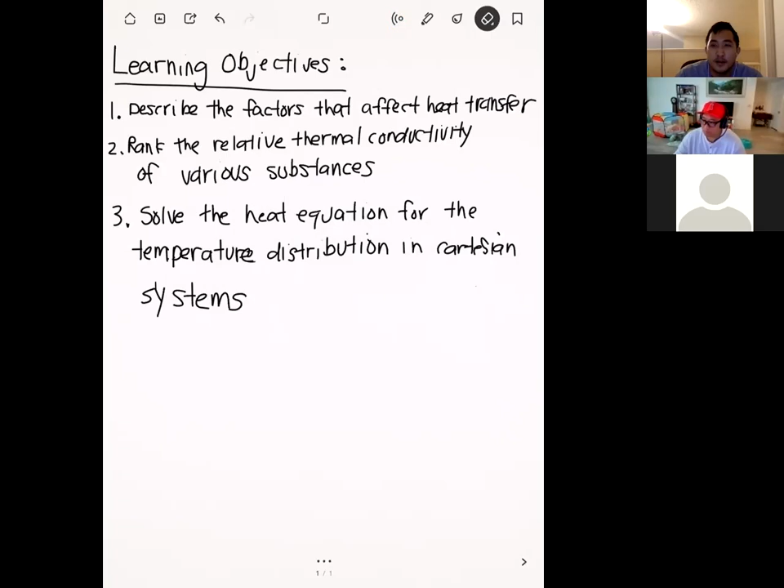So have you and your fiance started planning stuff yet? Not really. With the pandemic and everything, we haven't really started looking, but we're thinking about getting just legally married first, because we don't think we're gonna have a wedding maybe within the next 2 years even. So we're thinking just get it done at the courthouse, and we'll deal with the wedding after the pandemic. That's what a lot of my friends do.

Yeah, some of my friends have done a virtual wedding actually. They did the ceremony virtually, and they kind of just interacted with people online too. So that was kind of nice. They had already planned their wedding for end of 2020, so of course they had to cancel it. But the bride already had the dress and everything, so she wanted to wear it on the day of. So they had just a virtual ceremony on that day.

That's tough. When my wife gave birth to our daughter, I couldn't leave the hospital room for 4 days. Oh man. Not even to eat. I had cold sandwiches and salads. Oh man. So it was tough. That sounds tough. Just because no one can come visit in the hospital at all, huh? No visits. My wife had to give birth with a mask. Dang. Yeah, it was tough.

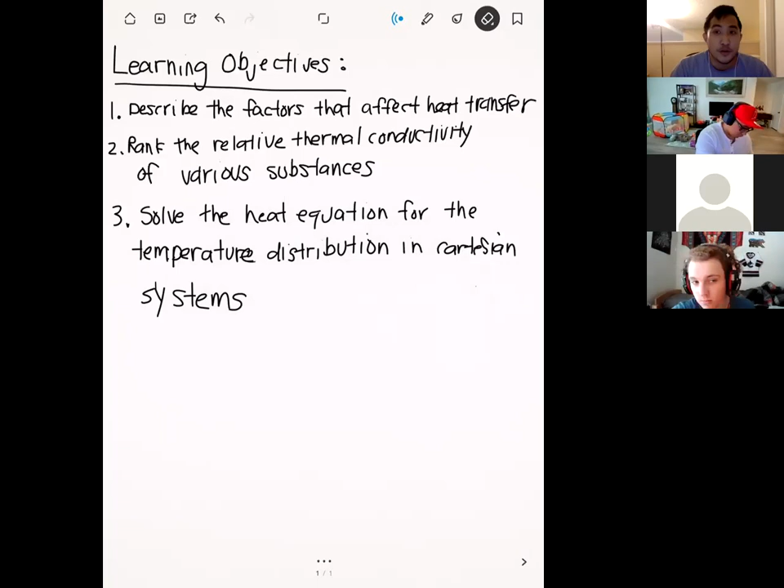Pretty good. Tired. Had an early morning class. Yeah, early morning class is definitely rough. This is mid-afternoon, but for me this time is always a little rough because it's my mid-afternoon lull. Eat lunch, food coma, and this is usually my time to take a nap. But thankfully it's not dinner time after this. It's cold, yeah. It's been cold lately.

So today we're starting our first real lecture, and the subject is going to be conduction. Last time, during our course introduction, we talked about the 3 different modes of heat transfer: conduction, convection, and radiation. From now up until the first midterm, we're going to be focusing purely on conduction. Here's our learning objectives for today. I have 3.

The first is to describe the factors that affect heat transfer. Second, we'll talk about a property all materials have, called thermal conductivity, what it is and how we can rank it among different substances. Then for the rest of the lecture, we'll talk about the heat equation: what it is, how we get there, and how we use it to solve for the temperature distribution. This is the usual lecture mode; last time I prepared slides because there were a lot of pictures I wanted to show you.

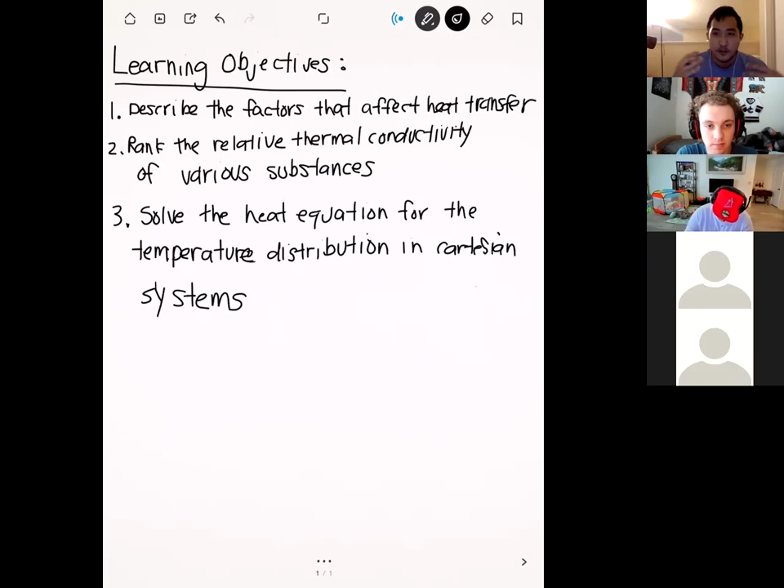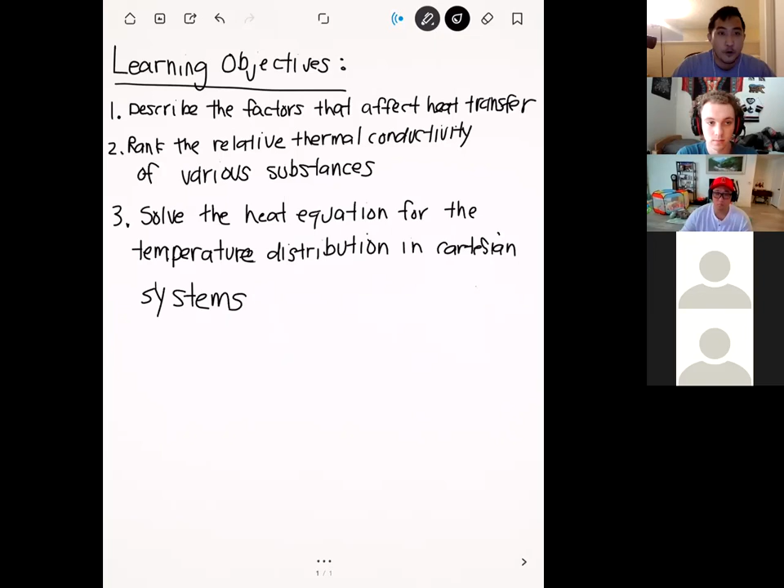All right, so let's get started with conduction. First thing, let's recall our definition of conduction that we went over last time. The definition: conduction is the transport of energy in a stationary medium due to a temperature difference.

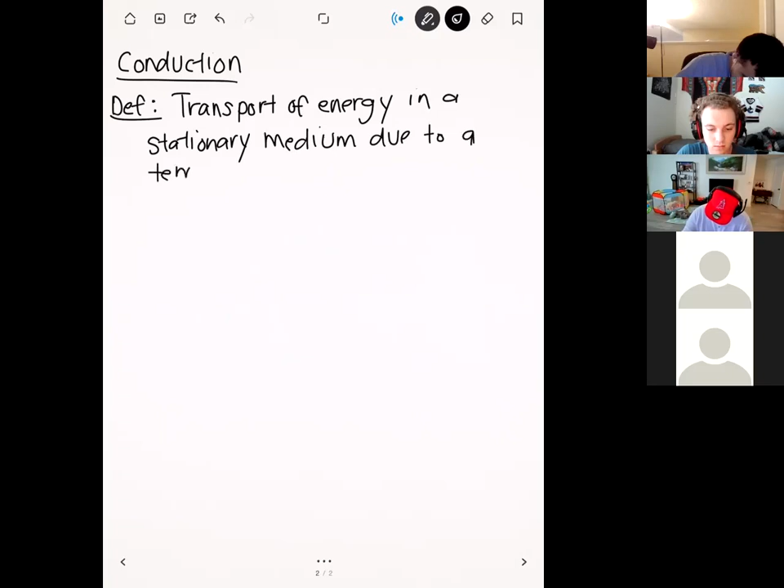What I mean by a stationary medium is just any kind of substance that isn't moving, because as soon as you have something that's moving, then we're in convection. But since we're in conduction, things are staying still. So anytime you have a temperature difference between two points in, let's say, a solid, then we have conduction. The first formula that we'll introduce with regards to conduction is known as Fourier's law.

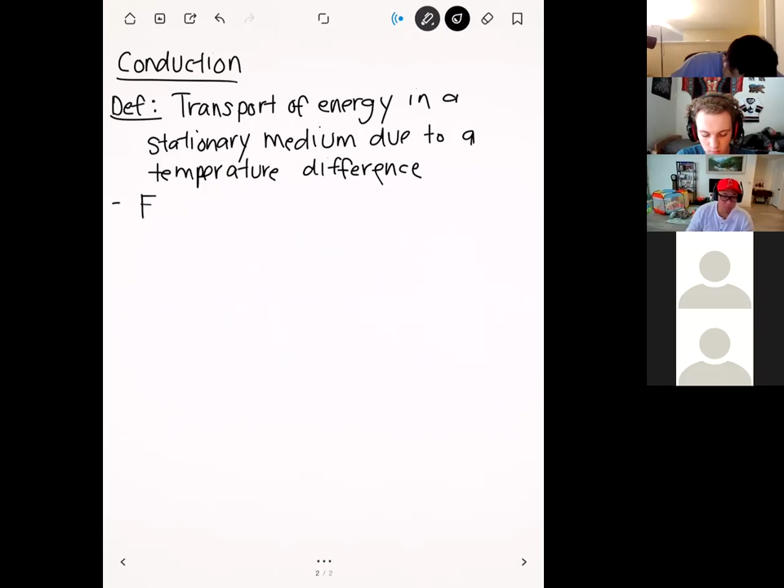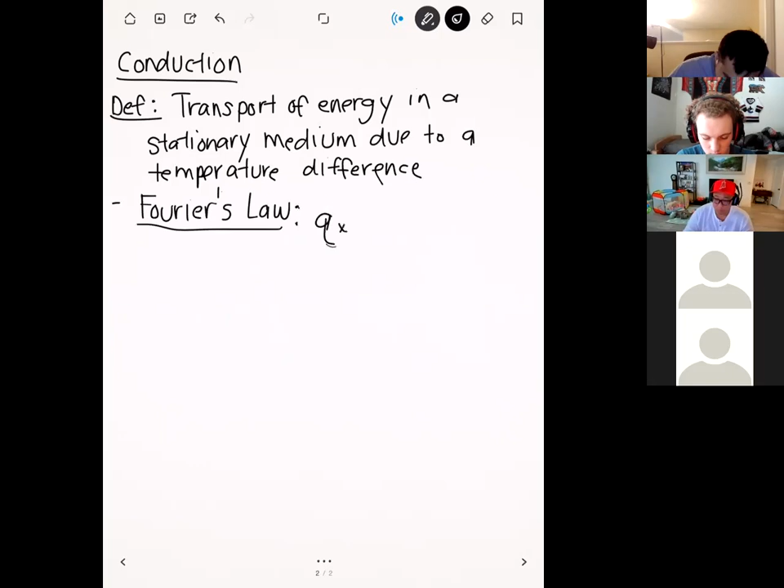It's spelled like Fourier, but I guess he's French, so it's pronounced Fourier. Fourier's law is given by the following: Q sub x is equal to minus k times A times dT/dx. Then let's define all of these terms.

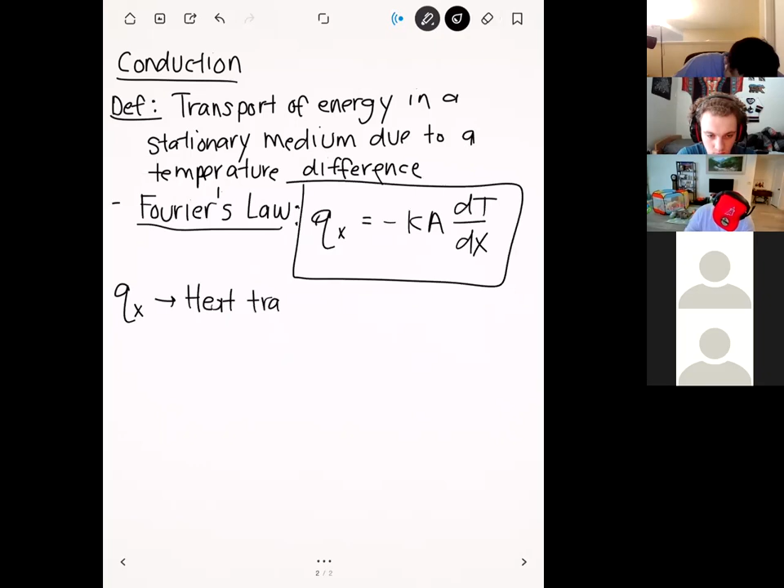First, let's start with Q sub x. Q sub x here is our heat transfer rate. The typical units for Q are going to be watts. So Q sub x is basically a unit of power: how much energy is being transported per unit of time.

Next, we have thermal conductivity, which is our k. We'll get into this more later, but basically you can think of this as a physical parameter of your medium that determines how easily heat moves. The units for this are going to be watts per meter degree Celsius. Those are the typical SI units: watts on top, and on the bottom meters, a unit of length, times degrees centigrade.

And A right here is our cross-sectional area. In particular, this is the area that is perpendicular to the direction of heat transfer.

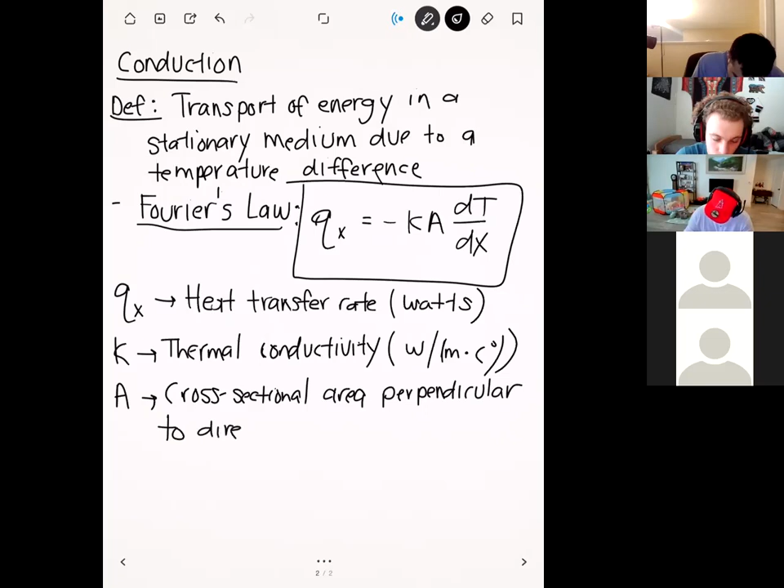Okay. And typical units for area is pretty standard. So we're going to use the SI units, meter squared, or of course it could be centimeters squared or inches squared, something like that. Okay. Big T, and so big T right here is just going to be temperature. Right. And so typical units of temperature that we'll use in this class are going to be degrees centigrade, or Kelvin. Okay. So Kelvin, I think, is typically used more in thermo, but in heat transfer, we can actually use either or, Celsius or Kelvin. Okay.

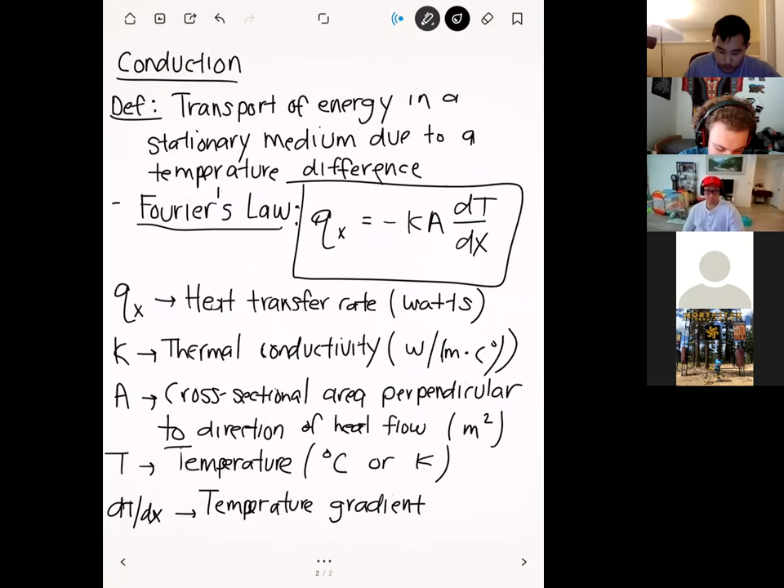Right. And then this derivative that we have here, dT/dx, this is known as the temperature gradient. Okay. And so what this is basically is how quickly the temperature changes over a certain distance. And we'll define that more on the next page. Right? And so typical units for temperature gradient are going to be temperature over length. And so we have, let's say, degrees centigrade or degrees Celsius over meters. Okay.

Right. So here's our Fourier's law and all of the parameters that go into it. And so what we're going to do next is we're going to go basically into each of these parameters and show how they affect heat transfer. Okay. So before I do that, are there any questions on this?

What's temperature? So temperature is just how you kind of interpret temperature. So whether something's hot or cold, right? So the more hot something is, the higher temperature is going to be. But more specifically, temperature is a way for you to assess how much energy that object has, right? And so typically objects that are really hot, we say that they have a lot of what's called internal energy. And so those are objects that are more energetic. And so that's why, when we say conduction is the transfer of heat from something that's hot to cold, that means basically energy is transferring from the hot surface to the cold surface. Yeah.

That was supposed to be a joke, but okay. We're still getting to know each other, so always take things seriously until then.

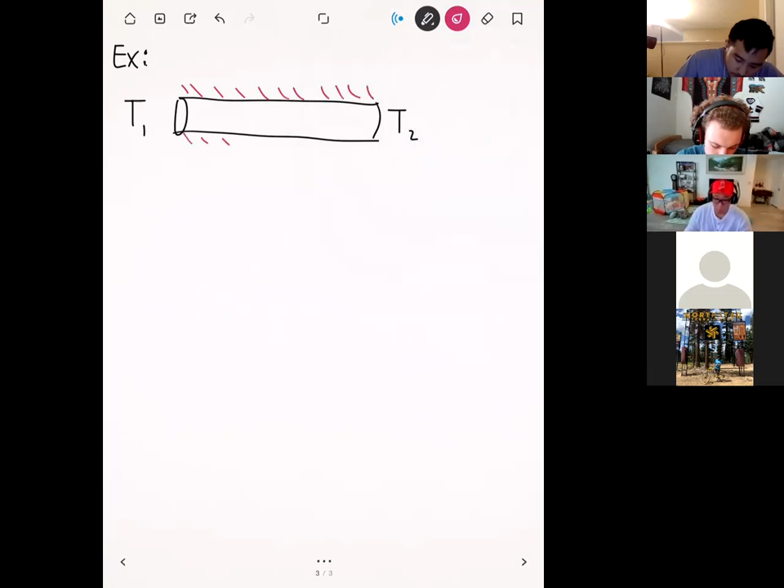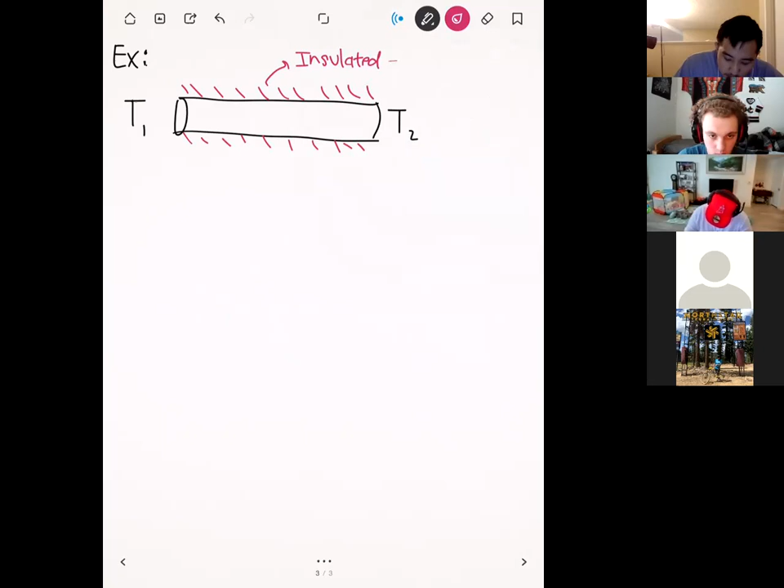Okay. And so let's go into this a bit more. So let's do just a simple example to illustrate this. Okay. And so let's say that we have a tube. And so we have T1 on one side and T2 on the other. And then let's say that the sides of the tube are insulated. So you'll hear the term insulated quite a bit in this class. And so all insulated means is that there's no heat transfer that can occur through that surface. Okay.

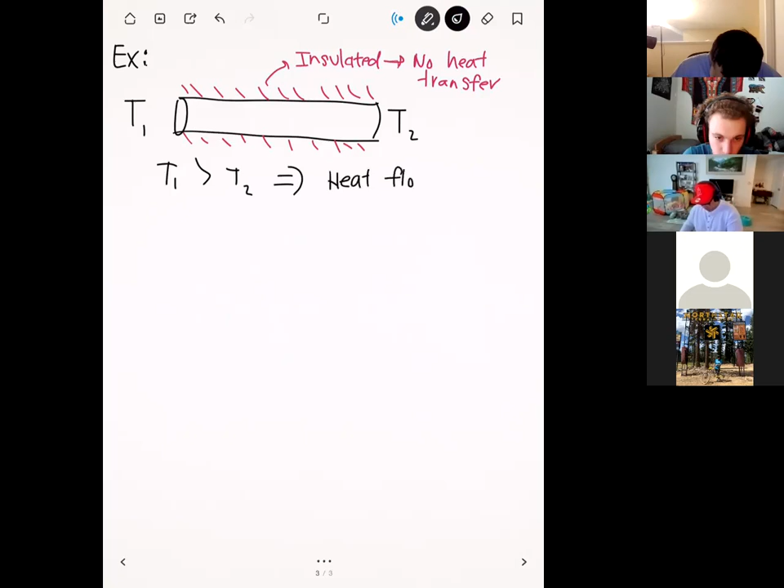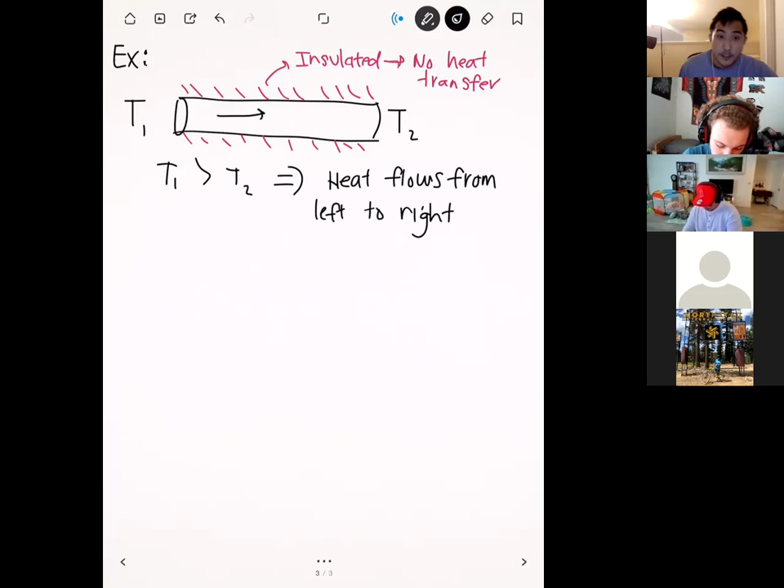And so if we have the situation where T1 is greater than T2, then what this will basically mean is that heat is going to flow from left to right. Okay. And so the direction of heat transfer will be this way. And so the sides being insulated is really important because normally if you have a tube like this, you can have heat that escapes out the sides. But if you insulate the outsides, there's really only one direction that heat can go, which is from left to right. Okay.

And so that's basically what Fourier's law says, that if you have a temperature gradient where basically you have a difference in temperature over a certain length, then heat transfer will occur. Okay. And so that kind of explains the temperature gradient part of Fourier's law. Right?

Question in the chat. Is truly insulated even possible, similar to frictionless problems? Yeah, that's a great point. And so you're right. Having something be perfectly insulated is never possible, right? Anytime you have a pressure difference, a temperature difference, no matter how much you insulate it or what kind of crazy materials you put into it, there's no way for you to block all the heat transfer.

But it's an assumption that we make often in problems because practically speaking, you can get close enough to perfect insulation. Let's say that this insulation right here maybe is not perfect, but if you compare the amount of heat that's escaping the outside to the heat that's going through the cylinder, the one going through the cylinder is a lot higher, such that we can ignore the ones coming out the outside. But that's a great point. So perfect insulation is never possible. Mm-hmm. Okay.

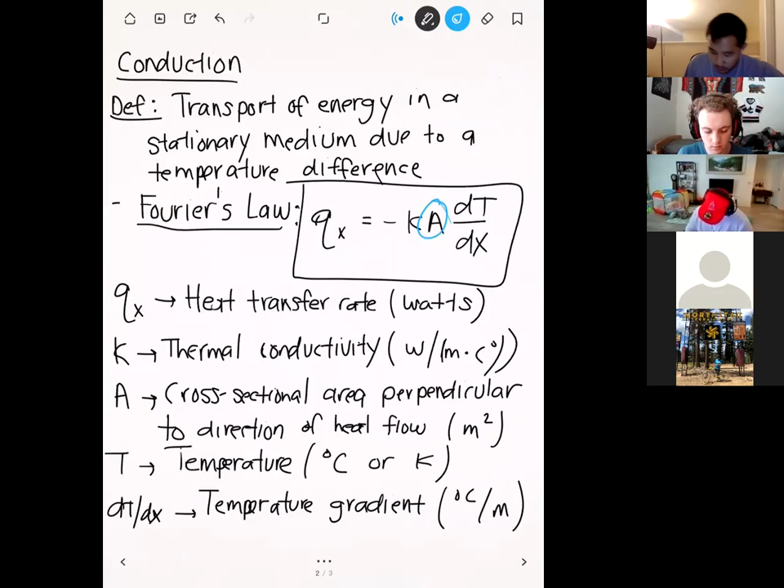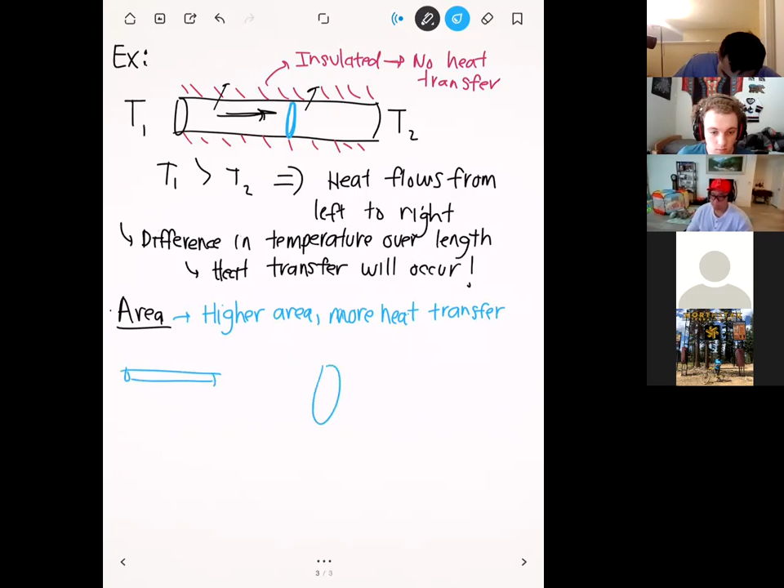Okay. And so this is pretty intuitive. So if you have a small tube compared to a large tube and you expose both of them to the same temperature difference, right? So you compare these two situations. Okay. The tube on the right here is going to have more heat transfer just because there's more space for the heat to go.

Okay. And so one way that you can minimize heat transfer in certain situations, if you don't want heat to go a certain way, is to minimize the amount of area or the amount of contact that you have in those places, right?

Let's see, comment in the chat. The comment says there was a video where a material was heated up to 2,300 degrees and a guy grabbed it with his bare hands because the material was a very poor heat conductor. Yeah, that's definitely possible. There's a lot of materials out there that are really terrible heat conductors. So even if it's really hot, you can still grab it, very little heat will actually come to your hands and you can be safe.

So a lot of those really crazy materials are used in aerospace applications because re-entry, like what you mentioned, incurs a huge amount of heating. That's actually one of the really cool applications of heat transfer, how to design re-entry without the whole thing just melting on itself. Yeah, space shuttle tiles definitely use the same thing. Anything leaving the atmosphere and coming back in is going to have a ton of heat transfer.

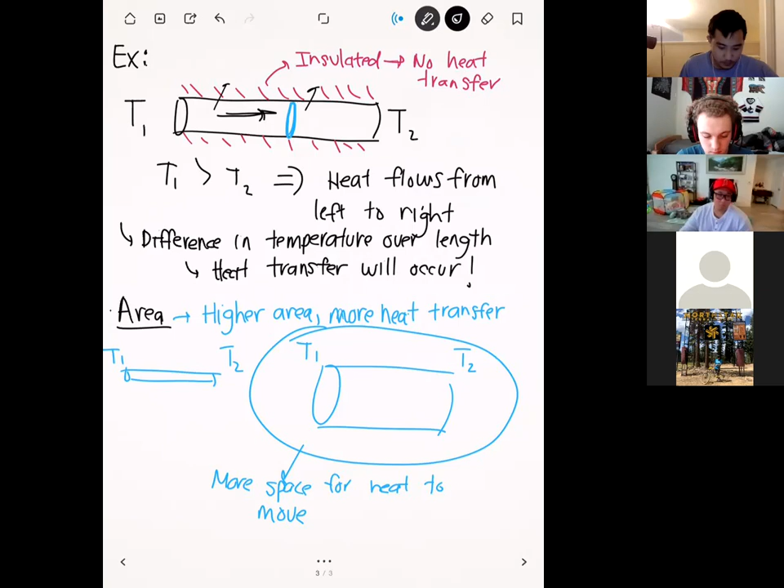Okay. Any questions on this so far? Okay. All right. Actually, let's come back to the temperature gradient again, and specifically, let's talk about the dx. Our temperature gradient is given by this expression here. Let me rewrite it. And in particular, let's look at the bottom. This dx right here represents some kind of horizontal distance that the heat must travel.

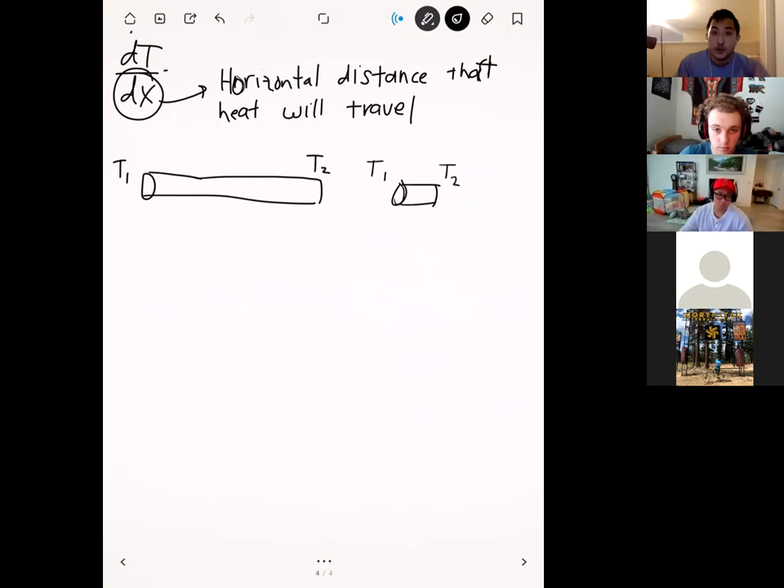Okay, once again, let's draw two situations and talk about them. Let's say that we have one tube, and it's a long boy, right? And then let's draw a shorter tube as comparison. Once again, the two ends of these tubes are exposed to the same temperature difference. Let's consider the one on the left first. We have our temperature difference, so heat is going to flow this way, but because we have a fairly long tube, the heat transfer doesn't have to be that high to achieve this temperature drop.

Whereas in our case on the right, the horizontal distance is really small, so to make sure the temperature drops from T1 to T2, the heat transfer here has to be much bigger. If we compute an approximation for this quantity, it could be T1 minus T2 over the length, where the length is this distance right here. So even though both cases have the same temperature difference, the second case will have a much higher gradient because the length is shorter.

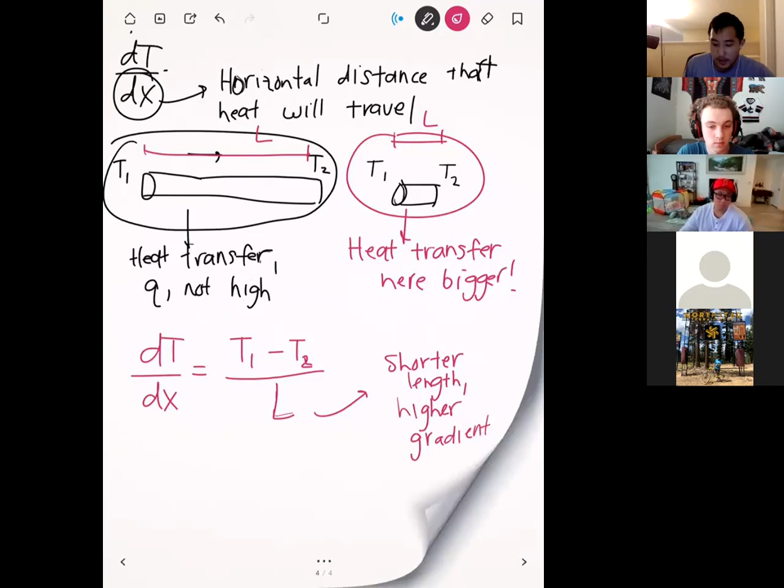Okay. So those are the two big things I wanted to talk about besides the thermal conductivity. Next, let's talk about that, because it's really important. Let's define this. The thermal conductivity is a property of the material, meaning a property of its chemical compounds. So aluminum will have a certain conductivity, and ceramics will have a certain thermal conductivity. What the thermal conductivity represents is how easily heat can move through these materials.

Okay. And so what this is a function of, and a lot of times, the way that we determine thermal conductivity is we simply just have to run experiments on it. So there's been a lot of tests that have been done over the years about what is the thermal conductivity of, like, aluminum. And so they run an experiment, they put a temperature difference, they measured how much heat was transferred, and then from there, we determined K.

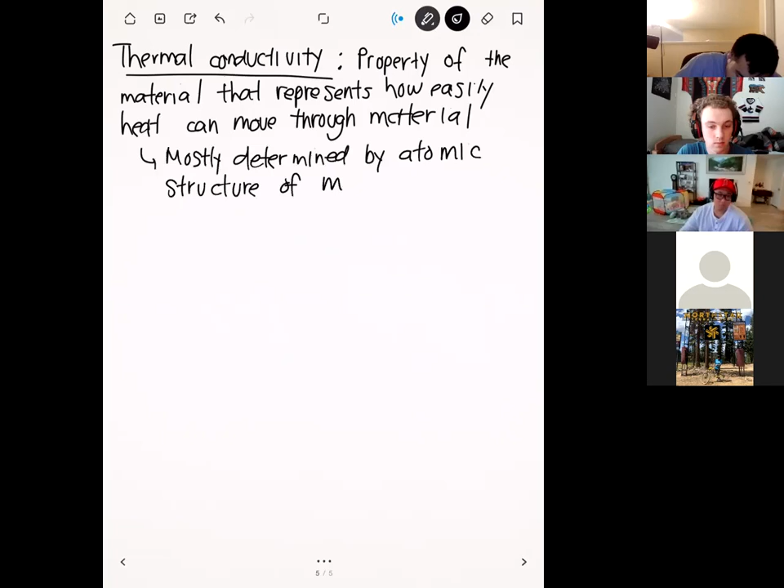And the reason for that is the main determining factor for K is actually the atomic structure, or how closely packed the atoms of that material are. Okay. And so in general, what you can kind of expect is that the more closely packed the atoms are, and the better organized they are, the more easily heat's going to transfer. Okay.

Okay. And so let's talk about kind of the relative thermal conductivities for certain materials. Most of the time, if you're doing any work on heat transfer, you just look these up in a table or any kind of material data sheet. But there are some general trends that we can talk about. All right. And so first, let's talk about solids, liquids, and gases.

Right. And so generally, what you'll observe is that solids have much higher thermal conductivity than liquids, and liquids have much higher thermal conductivity than gases. Okay. And the reason for this is that because something is a solid, their molecules are really closely packed together. Okay.

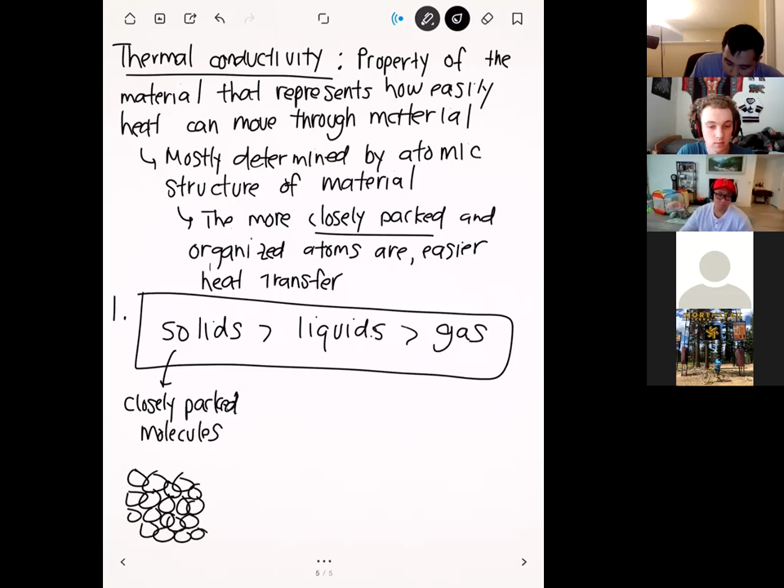And so if you kind of took a microscope and you zoomed in on a solid, you'd see a bunch of molecules that were kind of closely packed like this, right? And because conduction is essentially energy transfer between neighboring molecules or neighboring atoms, it makes sense that if your molecules are packed close together, it's much easier for them to transfer energy, okay?

Whereas if you compare that for a gas, in a gas, the molecules are there, but there's a lot of empty space between them, okay? And so you might have molecules that kind of look like something like that, right? And they're all kind of flying around. And so that's why gases tend to have the lowest thermal conductivity, just because the atoms just don't interact with each other enough to transfer heat, okay?

And liquids are somewhere in between that. So liquids, generally the atoms are pretty well packed, but there's still some space because they can move past each other pretty easily, okay? And so generally, if you are considering a solid, a liquid, and a gas, solids have the highest thermal conductivity, while gases have the lowest, okay? Okay, any questions on this? Okay.

All right, and so the other one I want to talk about is let's take solids again, because we're going to be focusing mostly on solids here in the conduction unit. And so let's talk about metals versus nonmetals, okay? Generally what you'll see is that metals have a much higher thermal conductivity than nonmetals, okay?

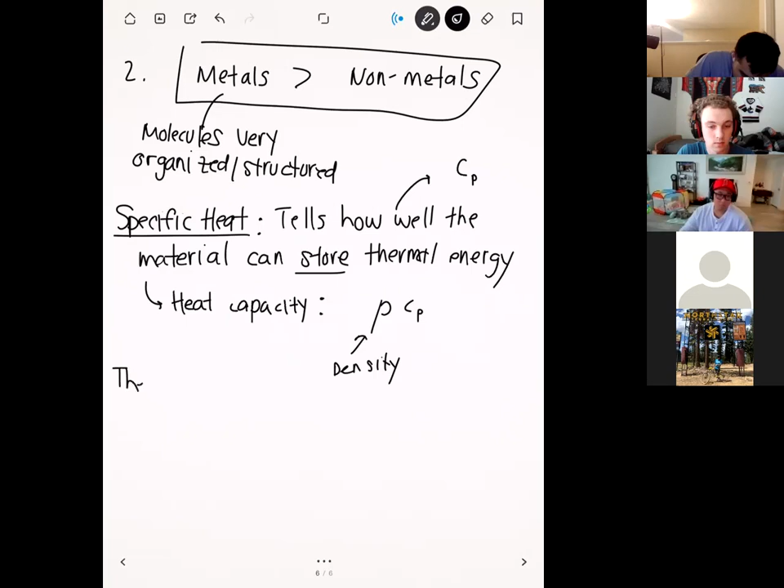Okay. All right, so that's heat capacity. And there's one more thing I want to mention, and that's the thermal diffusivity. Again, we're not going to be doing anything with this for now, but we will in a few weeks. Thermal diffusivity basically describes how quickly a material can respond to changes in temperature.

Okay, and then the symbol for thermal diffusivity is alpha, and the way that you compute it is that you take its thermal conductivity, k, and then you divide it by its heat capacity. So you divide it by rho times Cp. Okay.

And so materials with high thermal diffusivity, if you heat them up, they heat up really quickly. Whereas materials with low diffusivity, it's going to take a while for them to heat up. And that's a function of both how well heat can move through the material, that's why thermal conductivity is there, and also how much heat it can store, which is why heat capacity is there. So it's almost like the ratio between the two. Okay, any questions on this?

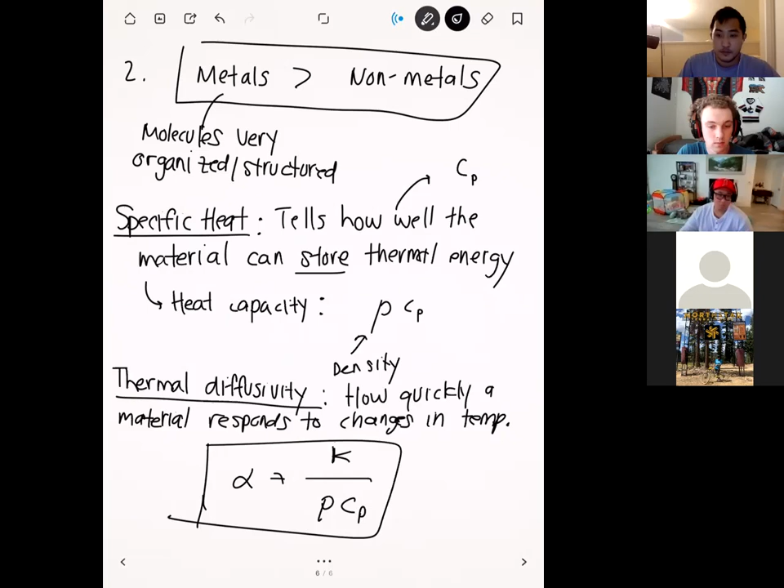Okay, so that covers all of the properties, at least for now, that we'll talk about. So now let's talk about how we actually start solving some heat transfer problems. The first starting point is the heat equation. We've already seen one equation, which is Fourier's law, and that relates heat transfer rate to temperature gradient. But usually when we're performing thermal engineering, what we want to know is the temperature distribution in our material.

And so Fourier's law comes into the heat equation, but the heat equation is usually the one that we actually solve. If you took fluids last semester, or have some fluids background, the heat equation is kind of like the Navier-Stokes of heat transfer, but it's a lot easier to solve. What the heat equation basically shows is how heat is spatially distributed. The physical mechanism through which heat moves through a surface through conduction is called diffusion.

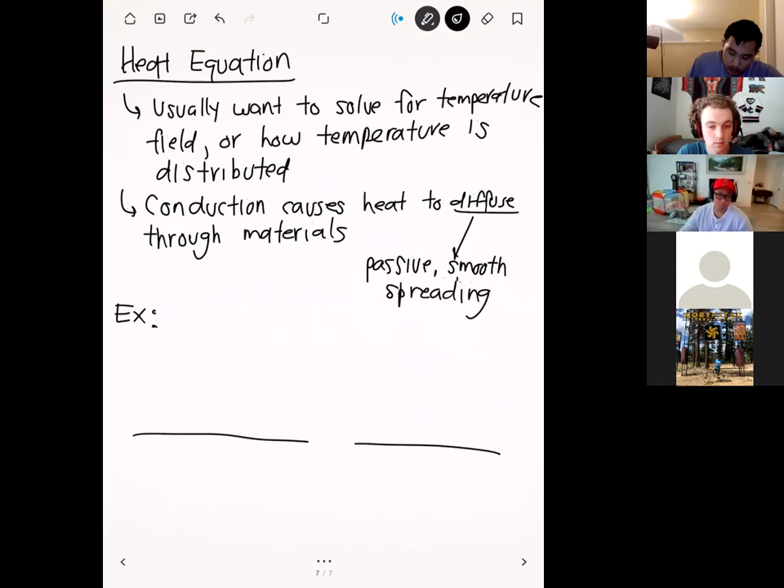Just to give you a visual representation, let's say we have something that looks like this. You just sprayed air freshener, so you have peak air freshener right above you. After some time has passed, that air freshener will spread throughout the room, equally in all directions. After diffusion has occurred, your air freshener might look something like this, spread throughout the room.

And so heat basically transfers in the same way. Heat is going to passively spread through your material, and that's what the heat equation is going to show us. I'm not going to go through the whole derivation of the heat equation because it's long and stuffy and not that useful. I'll just give you the equation, but I will talk about where you would go if you want to derive it, and more importantly, what each of the terms means. Before I do that, any questions?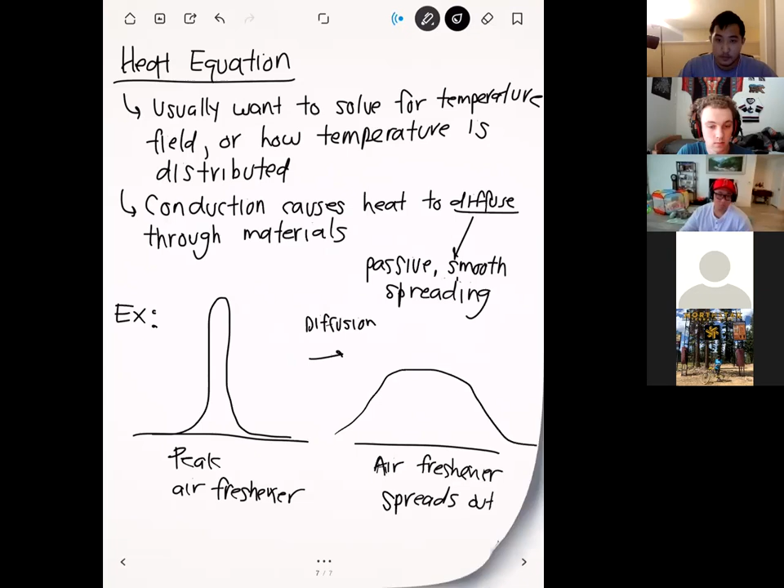Okay, so let's write out the heat equation. Thankfully, it's a lot shorter than Navier-Stokes. First we have the second partial derivative of T with respect to x, plus a quantity q dot over k, which I'll define in a second. And this is equal to 1 over alpha, remember alpha is our thermal diffusivity, times partial T partial t. That last term is the derivative of temperature with respect to time.

So let's talk about each of these terms individually. First, let's talk about this one. This is the second derivative of temperature with respect to space, and this term governs how the temperature varies in space.

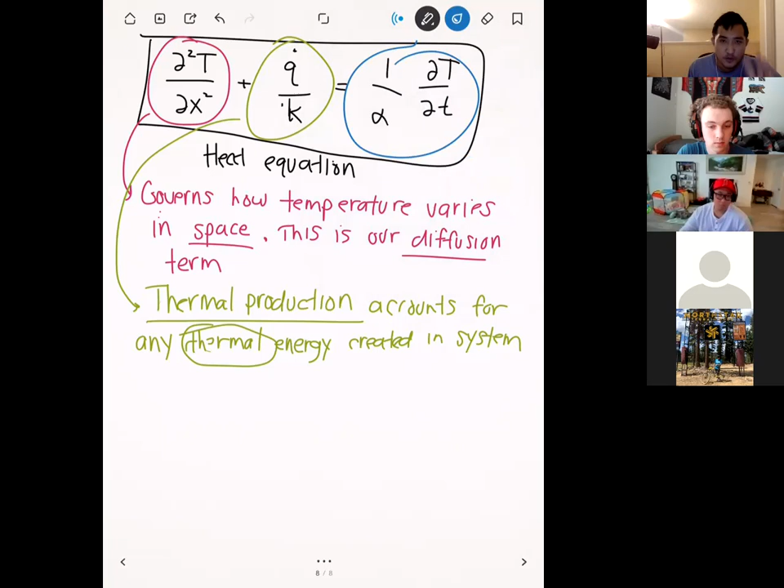And then the last term right here, which for most of the next couple of weeks we're going to assume is 0, is our unsteady term. The unsteady term describes how energy can be stored within the medium. And that's why we have our thermal diffusivity there in front, because that's what describes it. And so this is the heat equation here.

Again, I've skipped over the derivation, but if you are interested, it's outlined very well in the book. In a nutshell, you derive this equation by applying conservation of energy to a really tiny element, and then you work your way from there. If you're interested, we can talk about it outside of class. But just so we can do some examples, I'm going to skip through that derivation.

So this is our heat equation here. Right now we actually can't solve it because there are too many terms. And so the way we actually go about solving this is we have to apply some assumptions.

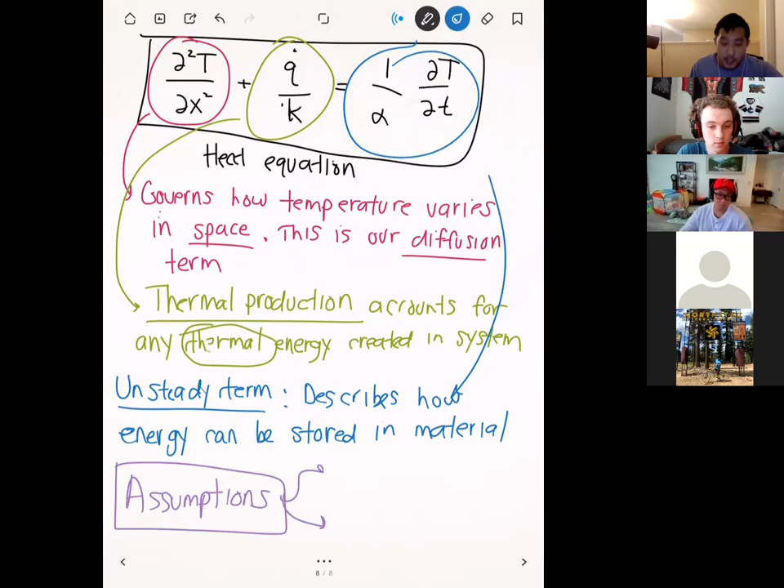Okay. And in particular, there are two main assumptions that we're going to make. The first assumption, which will always apply, at least for now, is we're going to assume steady state. When we assume steady state, what that basically says is that any time derivative is going to be equal to 0. So when we make the steady state assumption, we can cross out the derivative with respect to time, and that gets rid of that term.

We basically are almost always going to make this assumption until we get to transient heat transfer, but I'll let you know when we get there. Another assumption that we'll often make, which will sometimes be the case but not always, is we assume that production is going to be 0. When we make the no production assumption, we can cross out the green term right there. This happens pretty often. Usually the problem will explicitly tell you that there's some kind of thermal production. But if it doesn't say anything, or if the problem says you can assume it's 0, just go ahead and cross that out.

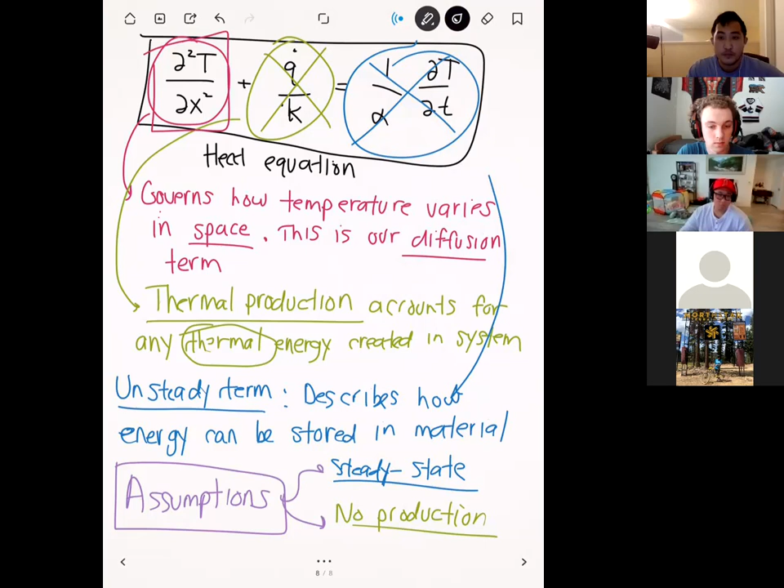So what we're left with after doing all that is just our red term right here. This is actually a pretty simple differential equation to solve, because we basically have the second derivative of T with respect to x is equal to 0, which I'll write on the next page. But before I go there, are there any final questions on this page? Okay. So what we're usually left with after making those two assumptions is this guy.

All right. This is technically a differential equation, and the way we can solve it is to simply integrate it twice. So let's go ahead and do that. We perform this integral once with respect to x, and the left-hand side becomes dT/dx, so we get rid of one of the derivatives. On the right-hand side, we get just an arbitrary constant, c1. Because we integrate 0, normally we get 0, but because we're doing indefinite integrals, we need to add a c1 over there.

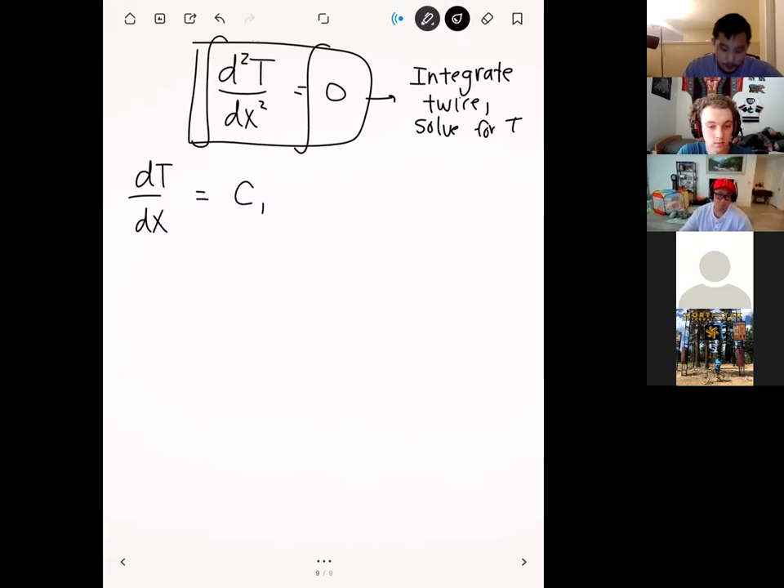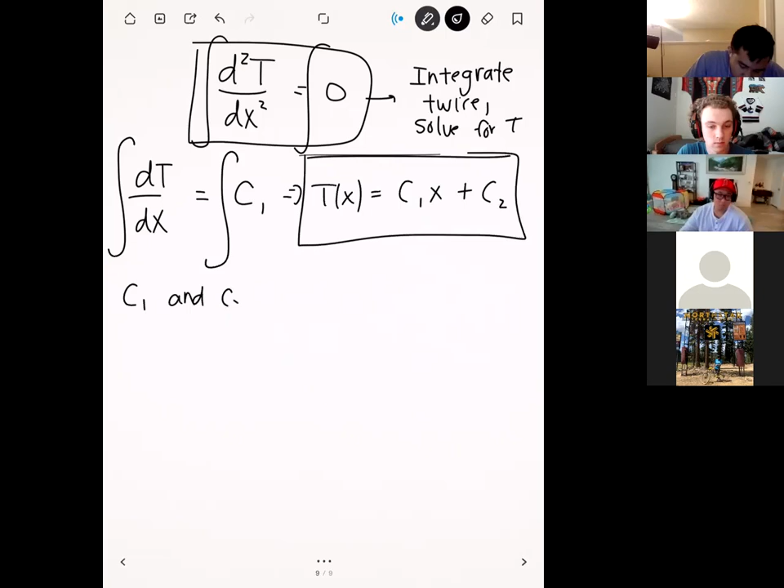We're not done yet, so we need to integrate this one more time. On the left-hand side, we get T of x, which is good. On the right-hand side, we integrate c1, which is just a constant, so we multiply it by x, and to that we add c2, a second arbitrary constant. That's the temperature solution, but we still have to solve for C1 and C2. If you remember from either 308 or maybe fluids, the way we solve for these constants is we have to apply boundary conditions.

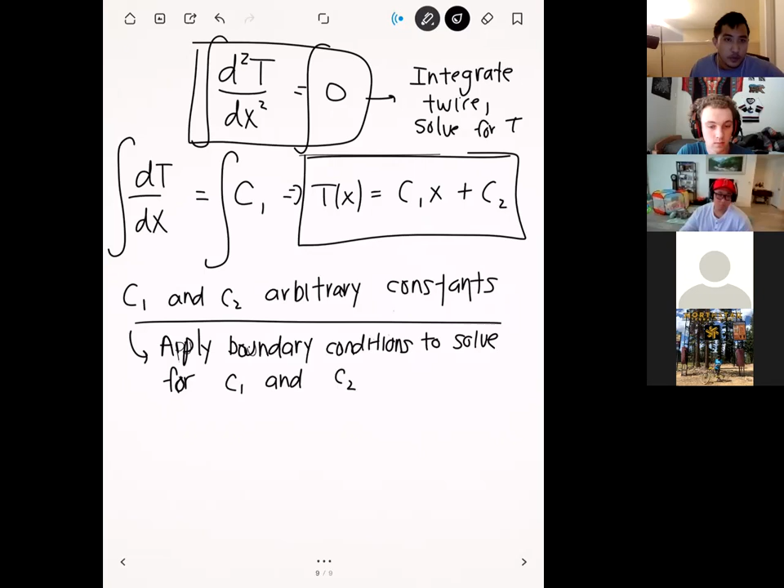For heat equation problems, there are 3 types of boundary conditions that we can specify. Let's go through the types of boundary conditions we can apply, and then we'll do an example problem that pulls all this together, and I hope we'll have time for a second example too. The first type of boundary condition is a constant temperature, or I should say a specified temperature. This is the simplest boundary condition you can have. Basically it says that one surface in your medium at the boundary is maintained at a known temperature.

Okay. And so mathematically, the way that you would apply this, let's say that our known temperature is T naught, so we'll say T0, and let's say that this is known at X naught. And so the way that you would apply this boundary condition is you would plug in X is equal to X naught into your differential equation, and you set that equal to T naught, and then you use that to solve for one of the constants. Okay. Any questions on this?

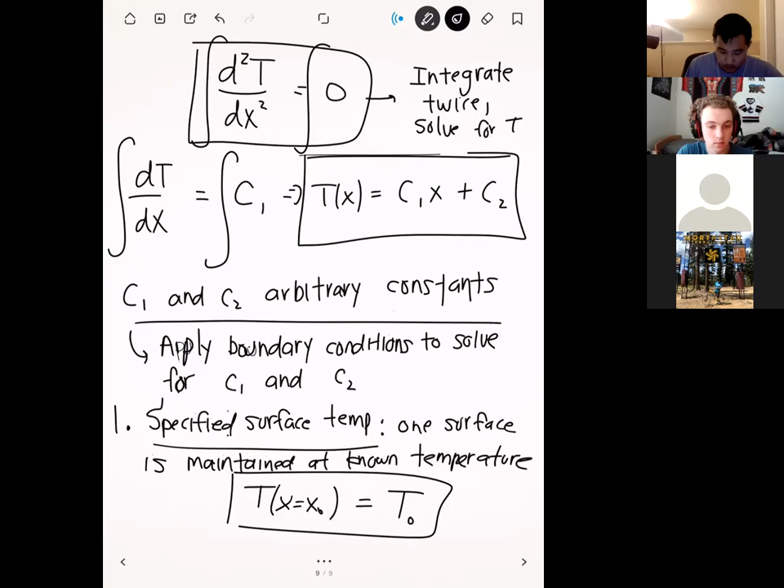Okay. So that's the first type of boundary condition. The next one is a specified heat flux or heat transfer rate. And so in these situations, you're going to specify not the temperature, but how much heat is going through that surface. And so for this, we're going to use the equation that we started with today, which is Fourier's law. So this has two different forms, and let me show you both of them here. So the first form is if you have a specified heat transfer rate, you would just use Fourier's law. And remember the units for heat transfer rate are watts.

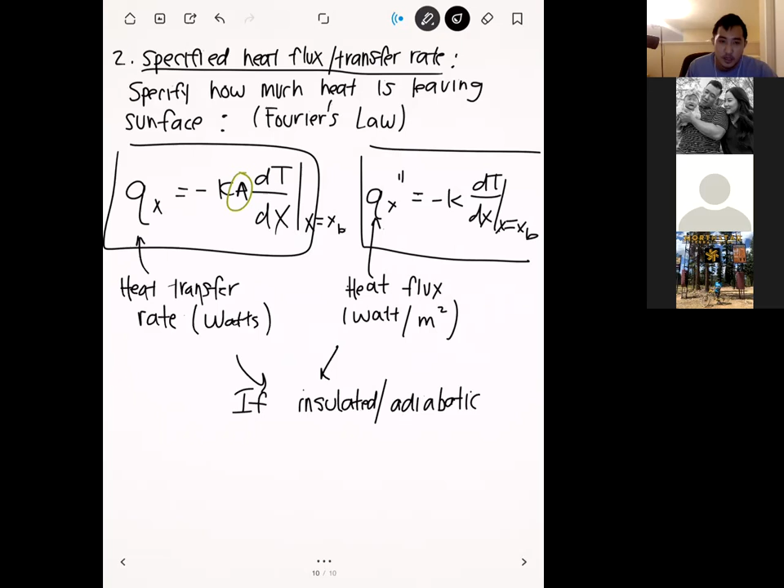Okay, and so a common special case for this, which we've already seen, is if your surface is perfectly insulated, or another word for that is adiabatic. In those cases, the heat transfer rate or the heat flux is going to be equal to 0. Again, it's impossible to get perfectly 0, but for practical purposes, it's normally okay. So sometimes it won't tell you that the heat flux is 0, but if the problem says that this surface is insulated or adiabatic, you can basically apply a zero heat flux boundary condition there. Are there any questions on this?

Okay. And so there's one more type of boundary condition I want to go over before we do an example, and that's a convection type boundary condition. I know that we're in the conduction unit, but oftentimes we're going to be faced with problems where we have convection that occurs on the outside, and we can actually use this as a boundary condition.

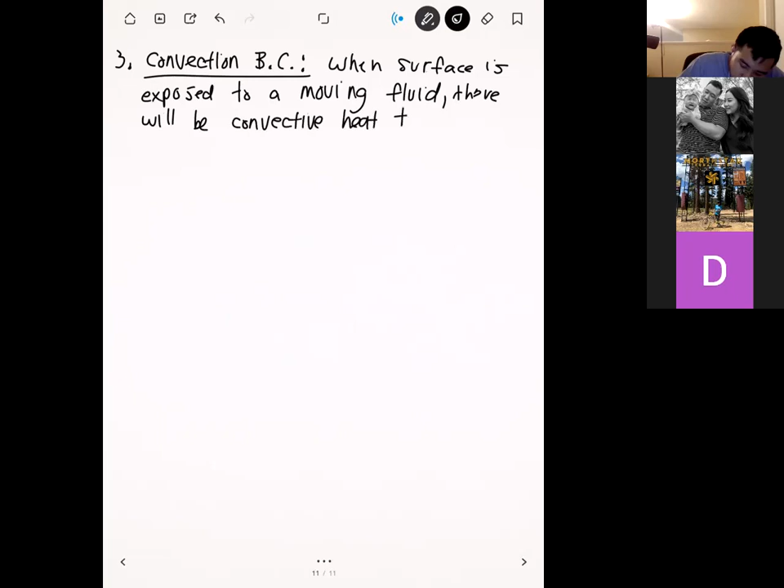Okay. And so these are unfortunately the most complicated boundary conditions. So the formula looks like this. On one side, you're going to have basically Fourier's law. And so we have minus k times dT/dx at x is equal to xb. And so that's basically the conductive heat transfer. And on the right-hand side, we're going to have the heat transfer due to convection.

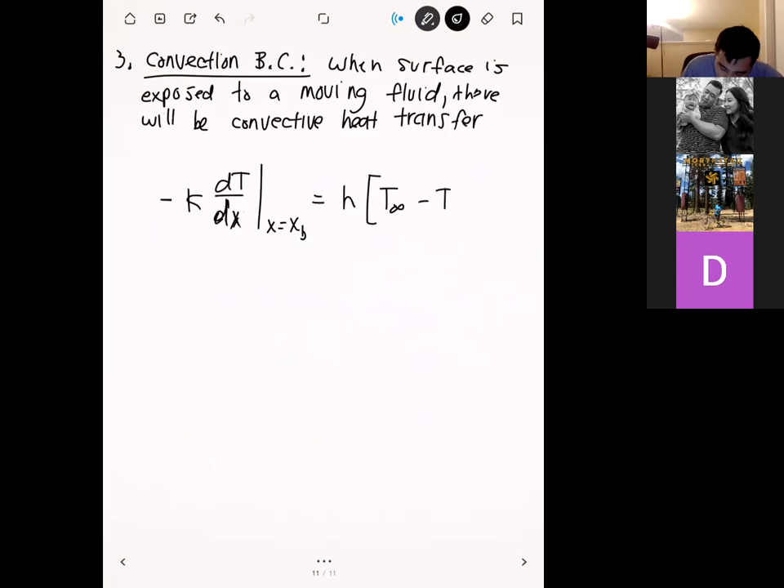And so the way that we describe this is using Newton's law of cooling, which we saw briefly in the introduction slides last time. And so this will be h, where h is our convection coefficient, which will always be given to you. And that's going to be times T infinity, where T infinity is the ambient fluid temperature. And then from that, we're going to subtract the temperature at the surface.

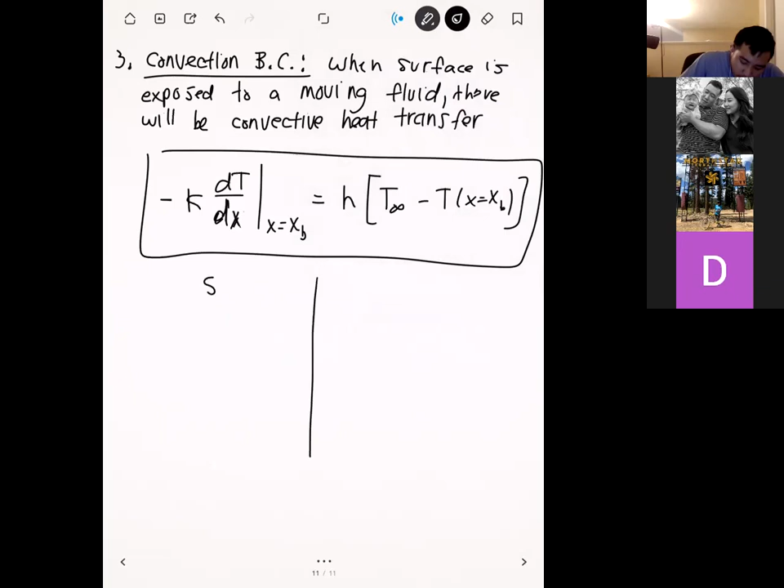And so visually, it looks something like this. On one side, you have your solid. On the other side, you have your moving fluid. And so the moving fluid usually is denoted by some arrows. This is just to show you that fluid's moving there. And then at the surface, we're going to have our temperature here. So we have T of xb. And this right here is our boundary.

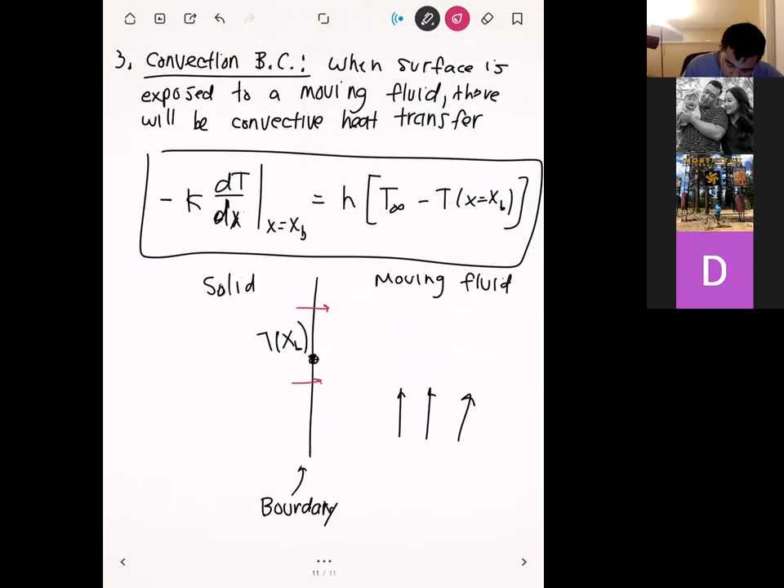And so what this boundary condition basically says is that the heat that's lost from the surface due to conduction, the heat transfer due to conduction, has to be the same as the heat that's absorbed into the fluid due to convection.

And so when you have a convection boundary condition, we're basically saying that the conduction and convection have to be the same at that boundary, basically because of conservation of energy. So any energy that crosses out due to conduction has to be accepted due to convection, and the other way around too. So if you have a hot fluid, the heat transfer that goes from the fluid to the solid, both the convection and the conduction calculations have to be the same.

And so we'll do an example with this one, probably not today but probably next time, that kind of shows that, because it can be a little bit tricky to apply. But are there any final questions on this before we do an example?

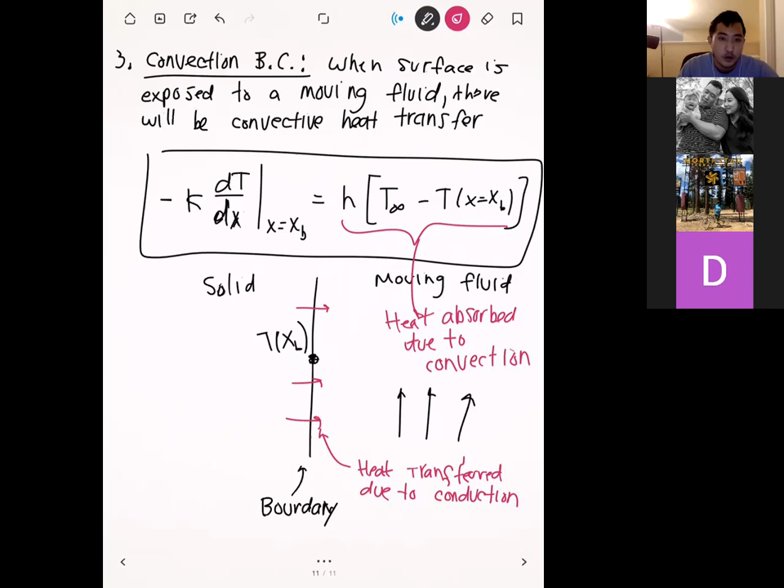Where you have the solid and moving fluid separated, does that correlate to the left and right hand side of the convection boundary condition equation? Yeah. So I put the solid on the left-hand side to correspond with the Fourier's law on the left, and I put the moving fluid on the right to correspond to the convection side of that boundary condition on the right. Yeah.

Okay. So let's do a simple example just so you can see the heat equation in action. Let's say that we're designing a window pane. And then on both sides of the window pane, we know both temperatures. And so let's draw the schematic for it. We're basically looking at a cross section of our window. So let's say you have your window, you turn it so that it's like this, and then you're looking at it like that.

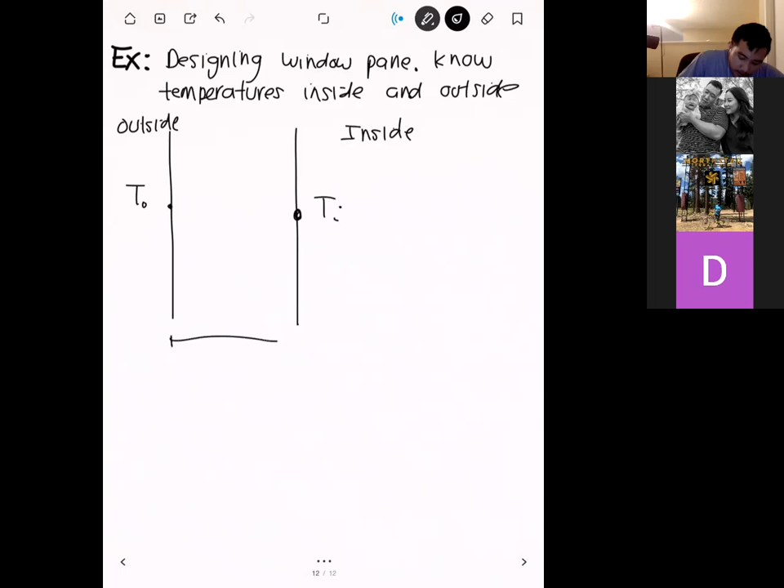And so on one side, this is inside. On the other side, we have outside. On the inside, we have a temperature Ti, and the outside, we have To. And then the width of this window pane will be L right here. On the left-hand side, we'll call this x is equal to 0, and on the right-hand side, x is equal to L. And so from this problem, what we want to do is solve the heat equation for the temperature distribution in the window.

All right, so there's our problem statement. And then let's state our assumptions. We're going to assume that there's going to be no production. And we're also going to assume steady state. And then our boundary conditions.

In this case, we have specified temperatures on both the left and the right. So let's go ahead and list those out. At x equal to 0, we're going to have T_o. And then T at x equal to L, this is going to be T_i. And so from here, we're basically going to start with the heat equation, integrate it twice, and then use the boundary conditions to solve for the constants.

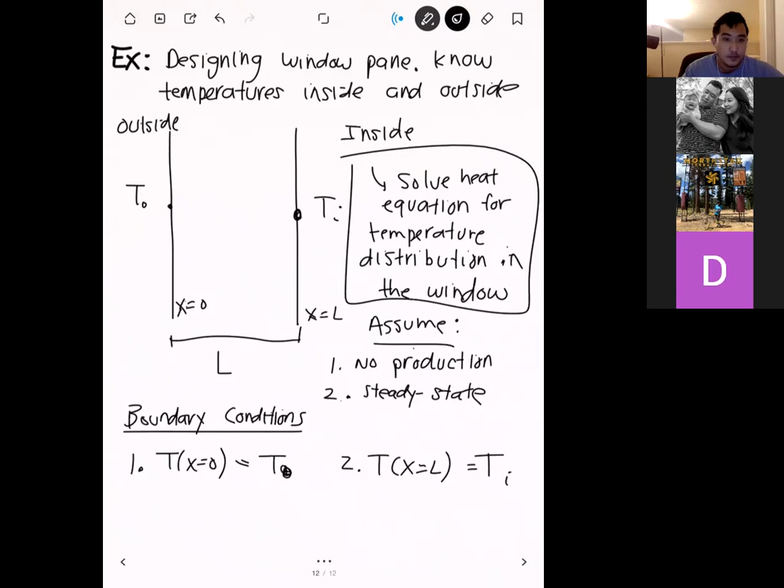All right. Any questions on this before we go about solving this? Whoa. Oh, that's weird. Okay. And so let's start with our full heat equation.

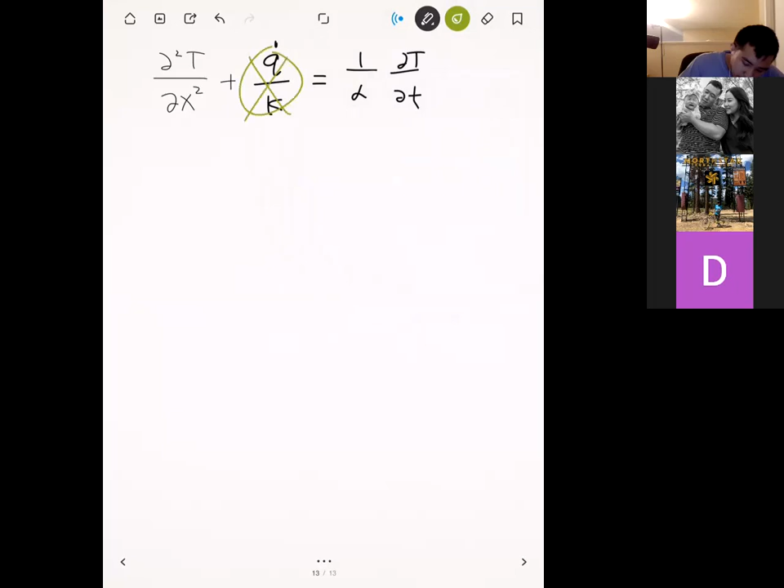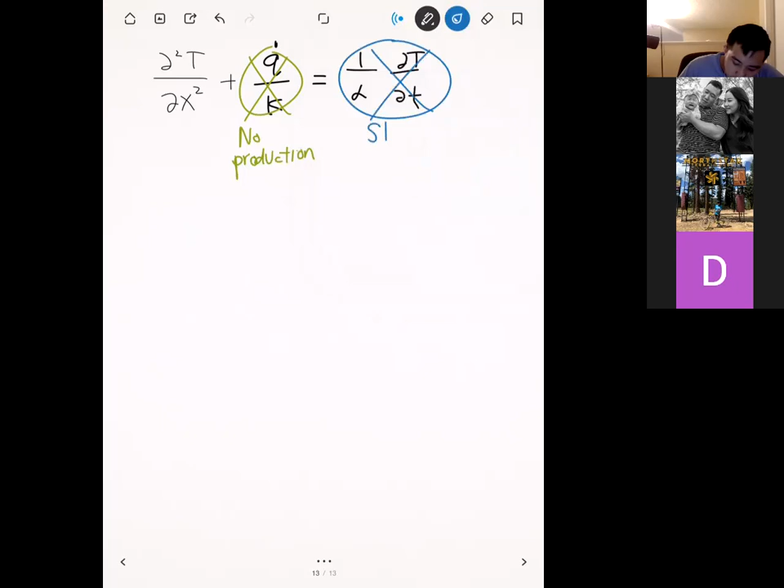So we have d²T/dx² plus q dot over k is equal to 1 over alpha partial T partial time. Okay, so let's apply our assumptions here. The first thing we assumed was that we have no production. We also assume steady state, so we can go ahead and cross that guy out. And so once we apply those assumptions, what we're left with is just d²T/dx² is equal to 0, right?

Which we've seen before. So this was kind of the one that we actually integrated. And so if we integrate this twice, what we're left with is T of x is equal to C1 x plus C2. So same as the derivation that we were working with before. And so now we can start to apply boundary conditions to solve for C1 and C2.

And so first, let's apply the boundary condition at x equal to 0. Usually that's a good one to start because that's usually a little bit easier. And so at x equal to 0, we have T of 0 is equal to T_o. So let's plug in 0 into our equation up here. So T of 0 is equal to C1 times 0 plus C2, and this is equal to T_o.

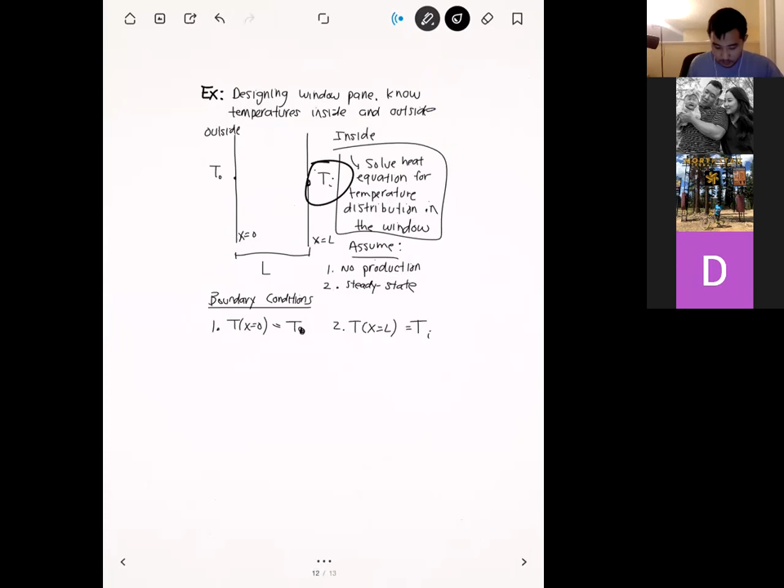Okay, and so when we plug in for C1 and C2, we get T of x is equal to T_i minus T_o, all divided by L, times x plus T_o. And this is our temperature distribution.

Okay, so it's 3:45, so that's all we've got time for today. Next time we'll do another example just so you can see a little bit more complicated boundary conditions and how to deal with those in the heat equation. And then from there, we'll start talking about thermal resistances, okay?